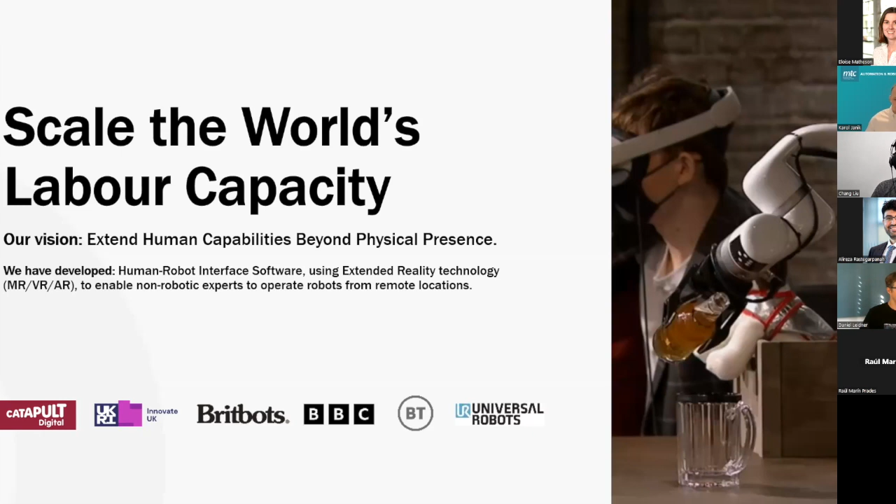So prior to Extend, I was a postdoc at Imperial College and spent 10 years in robotics and AI research and in high-tech startups. So I started the company in 2019 and brought together a strong technical team with expert experience in robotics, immersive technology, and cloud computing. So this team is well established with background from Imperial College, National Nuclear Robotics Research Centre, Tata Consulting, and AWS. We recently collaborated with Universal Robots and RAR UK Automation, one of the largest collaborative robot distributors.

Sounds great. The story starts from here. So the concept of teleoperated robots is nothing new. It was invented 50 years ago. I'm sure everyone in the audience is very familiar. It's mainly for surgery, nuclear, space, and military applications. The idea is simple: to allow skilled operators to remotely perform hard-to-automate physical tasks that are mission critical. But the question is why we have spent such a long time developing these technologies, but still are not able to adopt them in a wider market beyond these extreme environments?

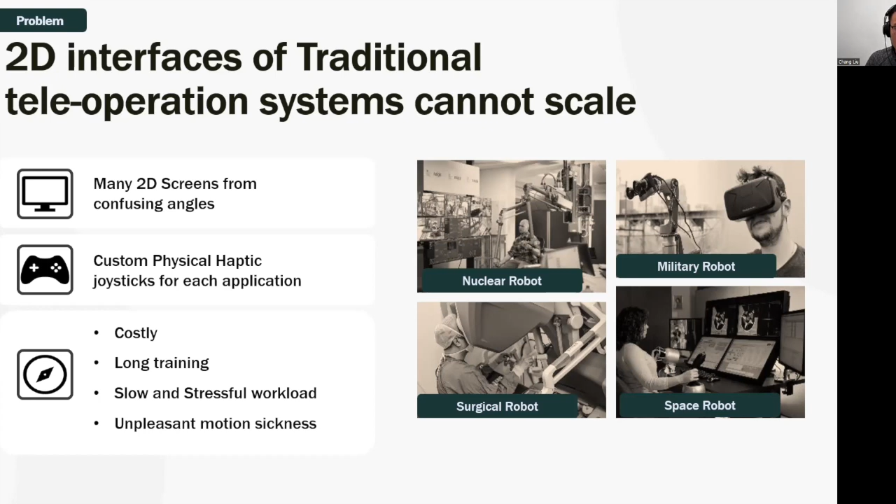Well, I believe the answer is really that today's robotic control interface sets a large barrier for people to use them easily. Their interfaces are custom equipment based on physical joysticks and lots of flat 2D screens. So therefore, they're typically expensive and hard to use. They require highly trained professionals to operate them, but still result in slow operations and stressful workload.

And our solution addresses these shortcomings and expands the potential of the market. So we have created a gamified human-robot interface middleware platform based on extended reality technologies, meaning VR, AR, or mixed reality. But we focus on creating the most advanced 3D graphics and streaming engine that has been patented.

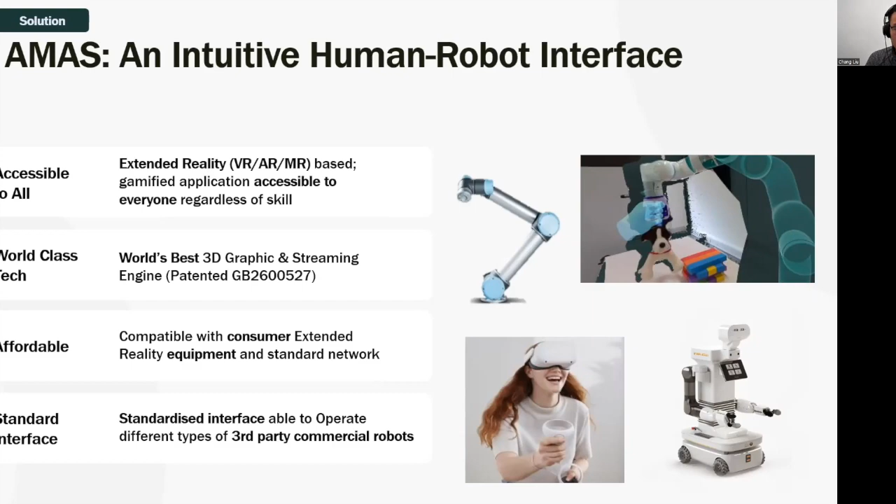Fundamentally, it offers an ordinary user an intuitive approach into a remote workspace, enabling the use of affordable consumer VR equipment as a standardized interface to operate a wide range of third-party commercial robots. So this really is a software-focused solution acting as an easy upgrade to existing third-party robots.

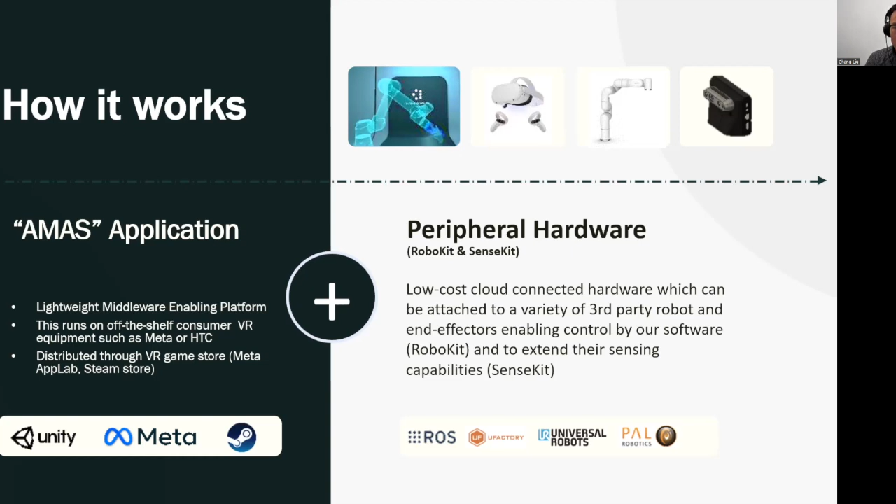It consists of two parts. First is the Extend AMAS VR application that's running on consumer VR equipment as ordinary VR games. And the second part is the peripheral hardware we call SenseKit and RoboKit, which can be attached to these robots, enabling 3D sensing, connectivity, and control. So both parts communicate over any networks to enable remote operations.

And so our patented volumetric streaming algorithm really gives us outstanding latency performance and 20 times bandwidth reduction compared to state-of-the-art streaming techniques. So bear in mind, this is really streaming the 3D volumetric data rather than a traditional 2D video. So that part is really outstanding.

So we're fortunate to be in a quite unique position in the market where our core technology combines outstanding 3D visual perception with intuitive control, and this results in an order of magnitude more productive solutions with lower cost of ownership compared to any alternatives in the market.

The benefit is really to remove the barrier for people to use robots by reducing the interface hardware costs from typically over 300,000 to just 300 pounds of gaming VR headset, reducing the setup and the operator training time from days, weeks to just a few minutes, and 3 times faster manipulations with reduced cognitive workload. And our integrated automation feature is more robust and more efficient with human in the loop.

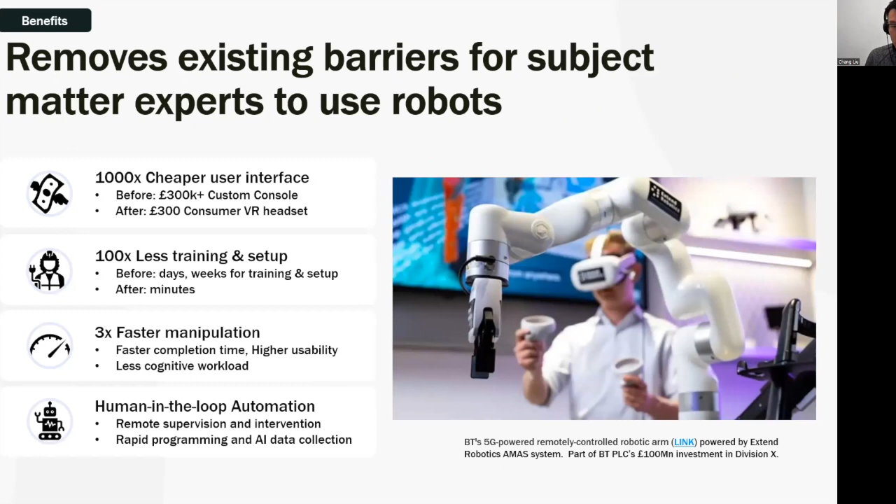The third part is the automation copilot that allows the operator to rapidly automate any physical tasks remotely on demand within the same interface. So this feature enables remote supervision, intervention, and reprogramming of automated pipelines, while being compatible with third-party automations via standard ROS interface.

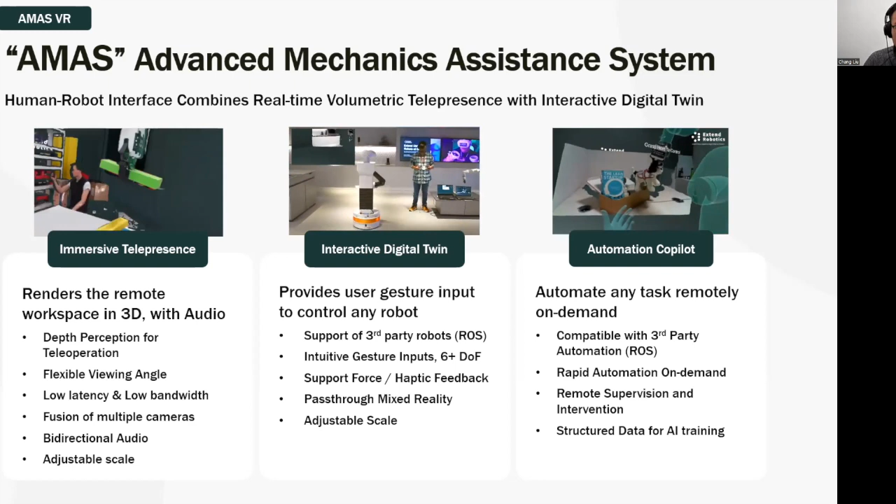So our vision is really that combining these three key technologies will enable large-scale fleet learning over the cloud via shared autonomy, ultimately delivering robust real-world value on day one with human in the loop, while accelerating automation by learning from human intelligence. And this is really our vision.

So we aim to have this automation copilot start with repeating simple tasks and ultimately learn to operate more general-purpose dynamic tasks over time, becoming more and more capable, and hopefully we can allow fewer operators to control more robots, and that's the method by which we scale labor capacity, as originally stated in our mission statement.

So that's the technology, and then a little bit about the commercial side. So with the large global market for telerobotics at 82 billion by 2027, our solution enables general purpose remote working, extending beyond traditional telerobotics applications.

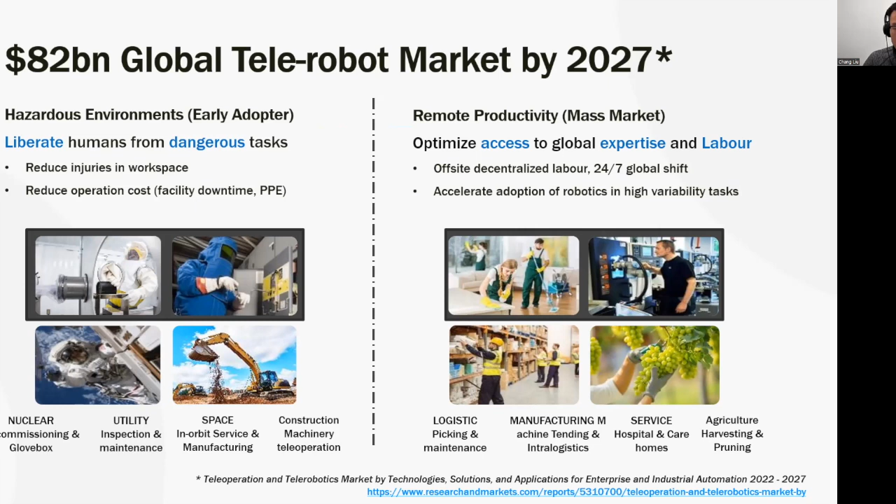So for our market entry, we typically set up three key offers for our customers. First, our core offer is the OEM software, offering recurring license fees to technology integrators and research projects who are already using their own robots. And second is the integrated system that combines one-off hardware payment with recurring license fees. This drives the adoption of new application users who don't yet have their own robots.

And third, for the case of tailored customizations, we'll offer professional services to support our visionary customers to fit their specific use case.

So far, we have established world-class channels and partners accelerating our route to market. We're partnered with the UK's largest robot distributor, RAR UK Automation, distributing our app through mainstream VR application stores. Second, we have been certified and are partnering with the world's largest collaborative robot vendor, Universal Robots, as well as UFactory, Mitsubishi Electric, and PAL Robotics.

Third is our strong connection with management consultancies and integrators, who will hopefully integrate the technology into enterprise and end users, and potentially resell our product as well. With any partnership collaborations, we're really keen to put most of our time into supporting our partners to integrate our technology better into their solutions.

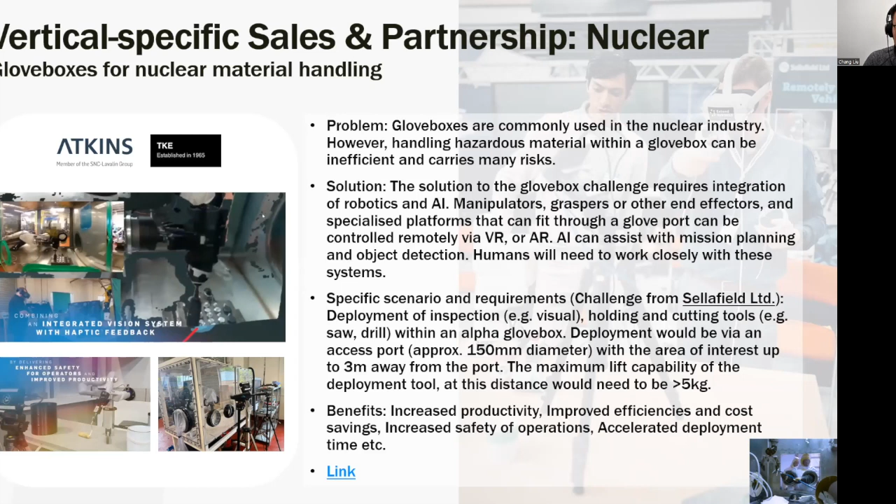So I've also prepared a few examples of use cases. One example is the nuclear use case for remote handling of contaminated materials in an Alpha Glove Box. We've been working with Atkins, one of the UK's largest technology integrators for Sellafield, who has purchased our software and peripheral hardware for their robotized glove box projects. This project will make glove box operations much safer and more efficient by removing human exposure to radiation risks.

A second example is the space application. We focus on in-orbit servicing and manufacturing applications. We've conducted several feasibility studies funded by UKSA and the European Space Agency, and the solution has been purchased by Satellite Applications Catapult. We aim to develop safer and faster operations to allow astronauts to perform complex handling tasks within spacecraft, and even allow subject matter experts from Earth to perform assembly and servicing tasks in space.

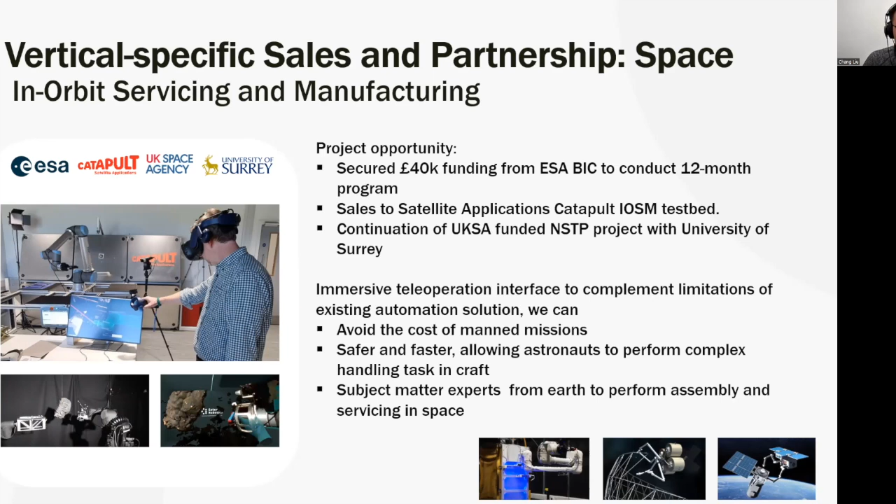The last but not least is the third use case: precision viticulture. We've led a consortium which includes Queen Mary University and Saffron Grange vineyard in Cambridge, to collaboratively develop an integrated human-augmented robotic and intelligent sensing platform to revolutionize grape harvesting and pruning. This is a 1 million pound project awarded by Innovate UK, and we'll be working on that as well.

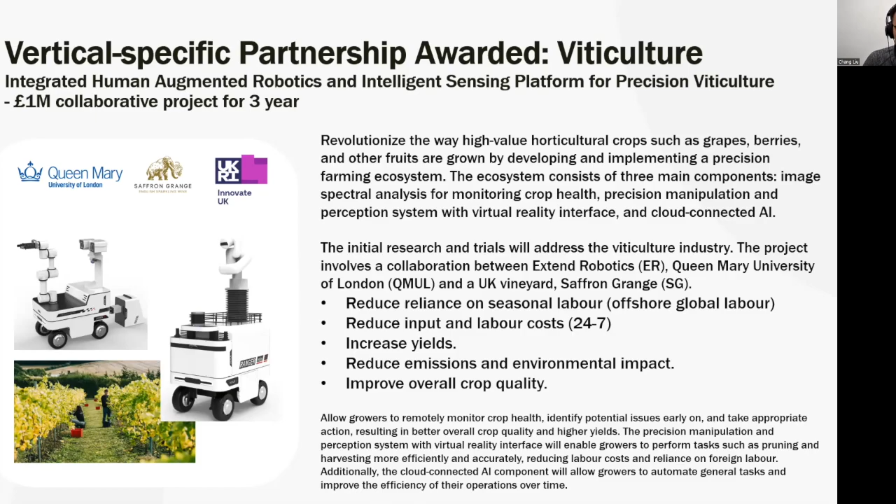Yeah, so that's pretty much it. I think it's about 15 minutes. Thank you so much for listening, and any questions would be great.

Thank you very much, Chang. Very interesting. If there are any questions, just feel free to ask or drop them in the chat.

The one question that I have: agri-tech is quite interesting in terms of telerobotics. Do you see much uptake in that space, more from an end user perspective rather than research and development? Because agri-tech with robotics is obviously tricky in terms of having the right business case for deploying complex solutions. It'd be interesting to hear your perspective on that.

Yeah, that's a great question, Carl. For agriculture, we've been engaging with quite a few farms in the UK. They responded quite positively. I think right now there's a strong need, especially with the labor shortage in the UK, with the kind of returning European farmers creating a big problem in labor availability, especially for harvesting and pruning. That work is labor intensive but also time sensitive, and during that period really need enough people to do the harvesting. So I think there's a strong need for solutions to bridge the labor shortage.

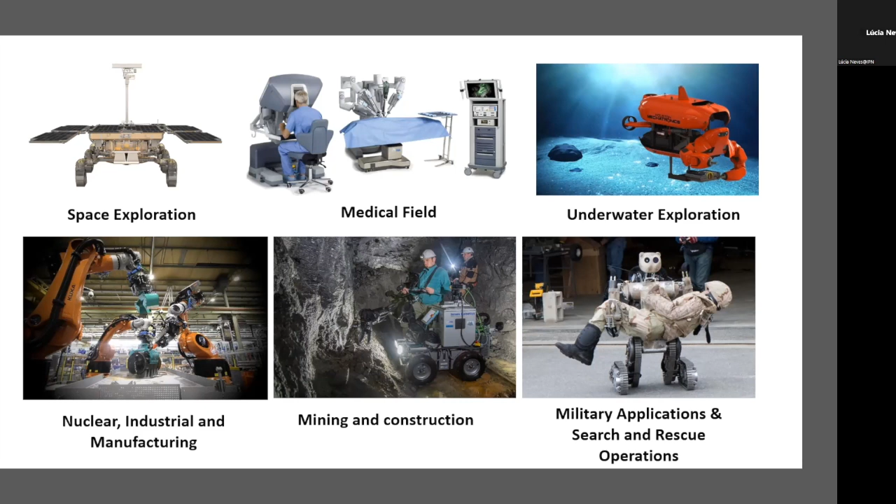Robotic telemanipulation significantly facilitates the execution of various challenging tasks across multiple domains by amplifying human manipulation capabilities in remote and safety-critical environments where direct human interaction is basically impractical. For example, in the medical sector, telemanipulation systems are used to perform complex surgical procedures, while in the nuclear context, they assist in conducting complex decommissioning tasks.

One of the common telerobotic systems usually used in the nuclear industry is master-slave manipulators. These systems have a master unit, which is operated by a human, and a slave unit, which performs actions in hazardous environments. Movements of the master are usually mirrored by the slave, providing a direct and intuitive control interface.

Currently, telemanipulation setups in an unstructured environment predominantly depend on the operator's expertise. Managing remote manipulation tasks using these mechanical devices in such settings is significantly challenging, and the operator also experiences a cognitive load during manipulation with these teleoperation systems.

To illustrate, when picking and placing an object in a remote scene, the operator must intelligently calculate the inverse kinematics while avoiding mechanical singularities and navigate the robots towards the desired positions.

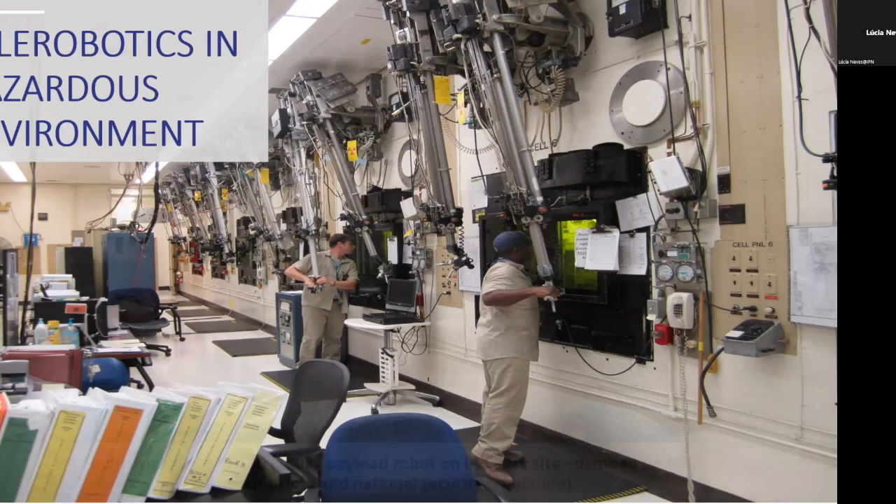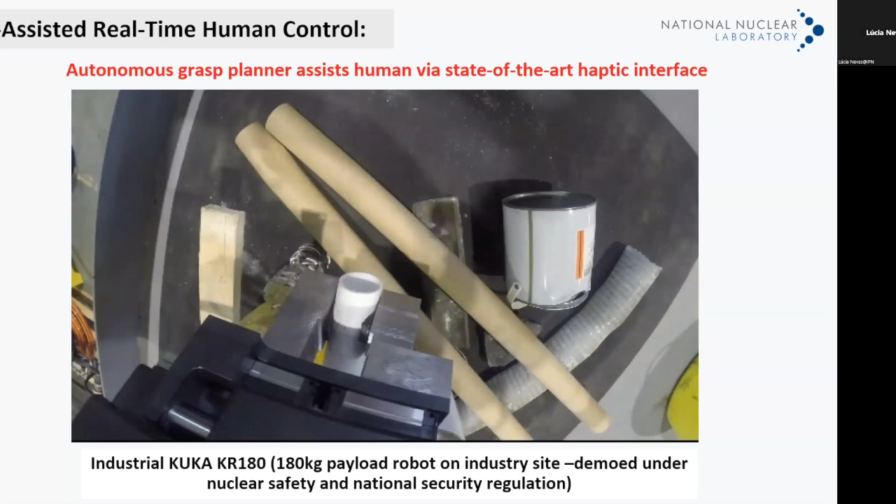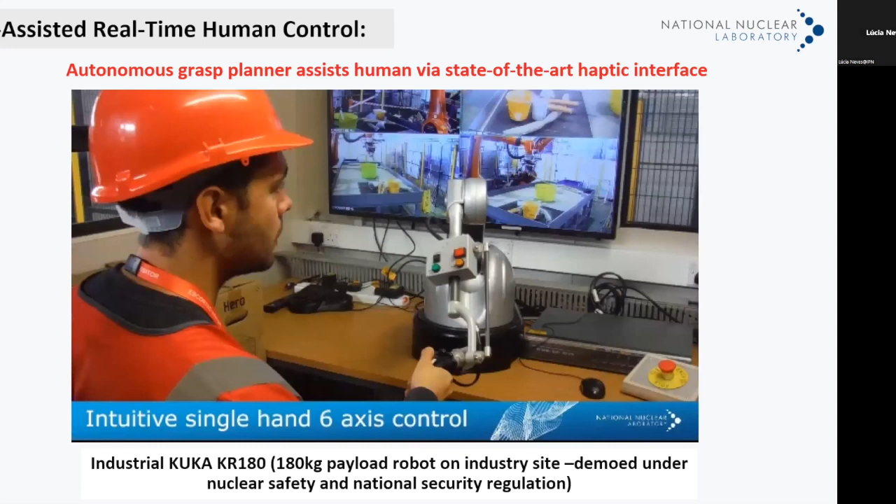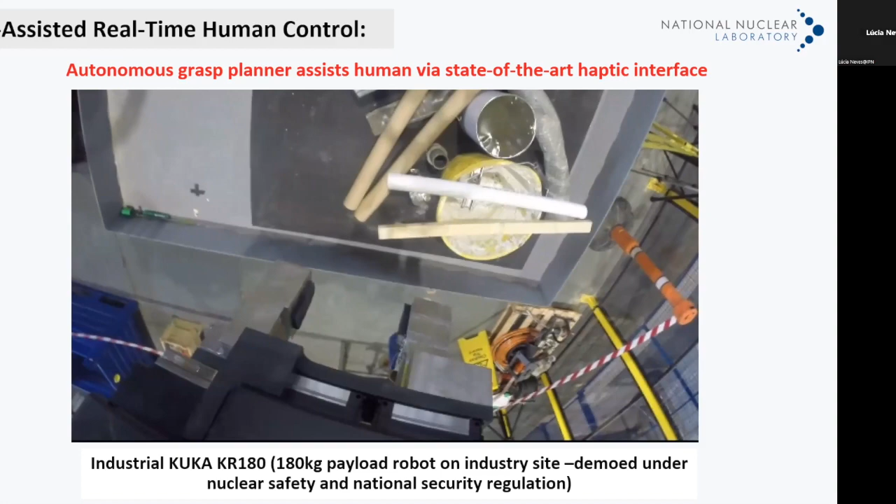We developed an autonomous grasp planner at a nuclear facility, the National Nuclear Lab, in 2016 for sorting and segregation of contaminated nuclear objects. We used a 6-DoF Haption as the master unit and an industrial KUKA KR180 as the slave robot. Our developed telerobotic system combines master-slave teleoperation with a model-free and learning-free grasping algorithm through a dynamic grasp re-ranking strategy and semi-autonomous reach-to-grasp trajectory guidance. The re-ranking metric dynamically updates stable grasps based on the slave device's current state, and the trajectory guidance system helps maintain smooth trajectory by controlling haptic forces. In addition, a virtual pose controller is integrated with the guidance system to automatically correct the defective orientation during reaching towards the grasp position. I will go into detail about the grasp planner in the next slides.

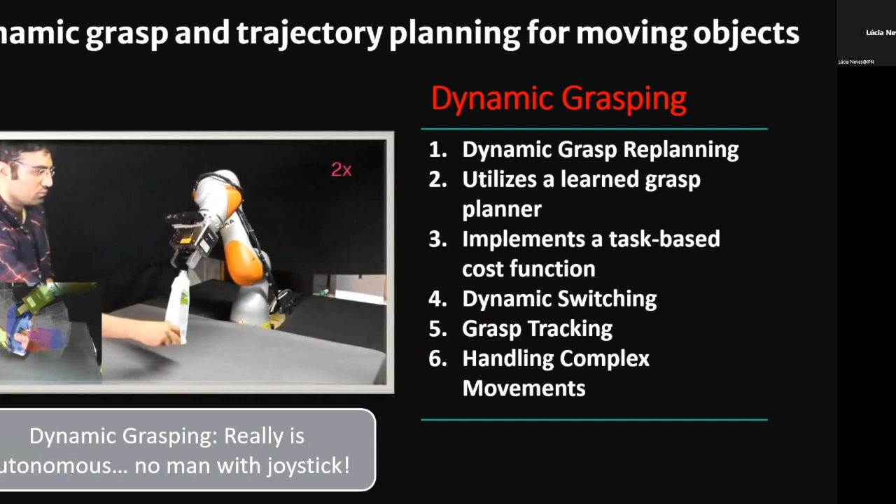This is me in the video, back when I was younger, in 2017. As you can see, the robots can follow and grasp moving objects tracked by a vision system, and I can hand over the object to the robot during collaborative working. This is really autonomous, and there is no man with a joystick sitting behind the scene. While I randomly move the object, a set of likely grasps are evaluated online to generate a feasible grasp with respect to the current configuration of the robot, the target grasp, and also the constraints of finding a collision-free trajectory to reach that configuration.

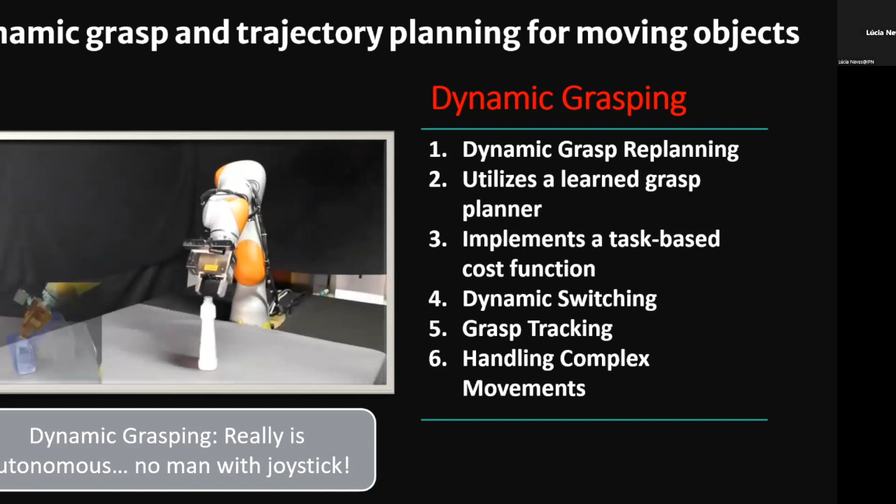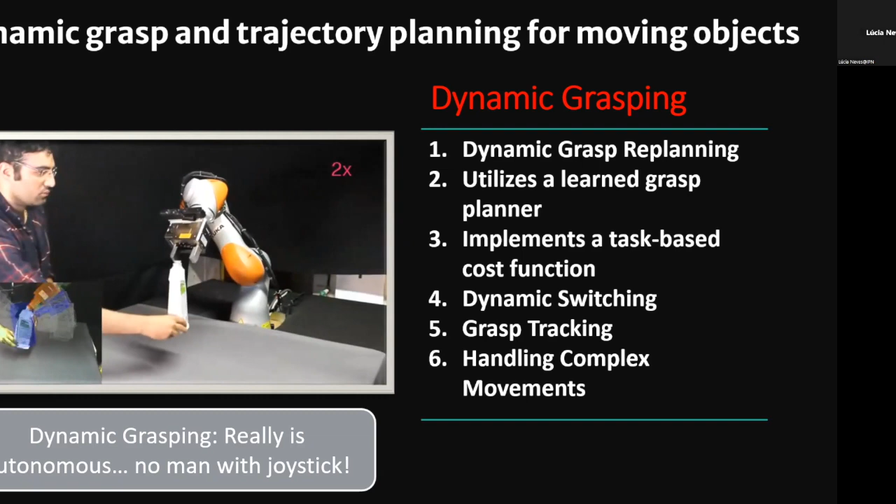We developed a method that dynamically switches between two planners: a local planner, which smoothly tracks the object and keeps a steady pre-grasp pose, and a global planner, which quickly moves the hand to a new grasp on a totally different part of the object if the previous part becomes unreachable. This is our grasp planner, and I will explain how we integrated it into telerobotics platforms.

Telerobotics is also a crucial tool in remanufacturing, particularly in the automotive industry, for the reuse and recycling of EV batteries, electric vehicle batteries.

I'm the co-I of the EU-funded REBELION project, and I'm also leading the automation part of the ReLiB project, which is funded by the Faraday Institution. These two projects primarily focus on robotizing the process of testing, disassembly, and sorting of EV batteries using advanced robotics and artificial intelligence. Battery disassembly has a hierarchy that starts at the pack level, goes down to the module level, and ends at the cell level.

However, the process of robotic disassembly is challenging and carries high safety risks, such as thermal runaway and explosion. This means the temperature can immediately rise to 600 degrees Celsius, and even firefighters may abandon a burning vehicle on the road, returning only a few days later to remove it. Other risks include the release of electrolytes and toxic gases, short circuits, and fires, which necessitates the use of telerobotics for safe and remote operations.

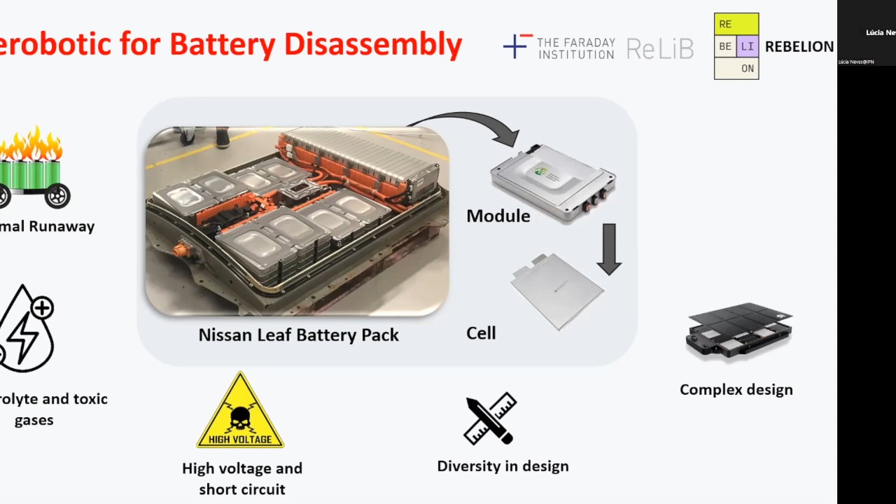In addition, there is diversity in the design of batteries and a lack of information from manufacturers about these designs. This means any development must be generalizable to be applicable to different battery models and different types of batteries. There are also almost no safety regulations at the moment related to EV batteries.

At the moment, we hear a lot about EV batteries reaching the end of life. However, we are also facing another serious challenge with the pile of damaged batteries. Sometimes these are only labeled as damaged, but with proper testing, they can be brought back into their life cycle. Sometimes only by replacing a battery module, the entire pack can be retrieved.

I'm working closely with one of the largest insurance companies in the country, which is struggling with an increasing number of these damaged batteries. The only solution available at the moment is to send these damaged batteries to salvage centers for direct recycling, shredding them into small particles to create black mass. Unfortunately, the quality of the black mass is not sufficient to manufacture new batteries using these materials. Therefore, there is significant profit loss for insurance companies and end users, primarily due to the lack of a safe mechanism for testing and disassembling these high-risk batteries.

To address this challenge, we have developed various frameworks for the autonomous testing and disassembly of EV batteries.

We have categorized disassembly tasks into autonomous tasks, such as repetitive actions like unbolting, and semi-autonomous tasks, which are sensitive, like cutting the battery module to remove the cells. What you see in these videos is a pilot study designed for disassembly and sorting disassembled EV battery components.

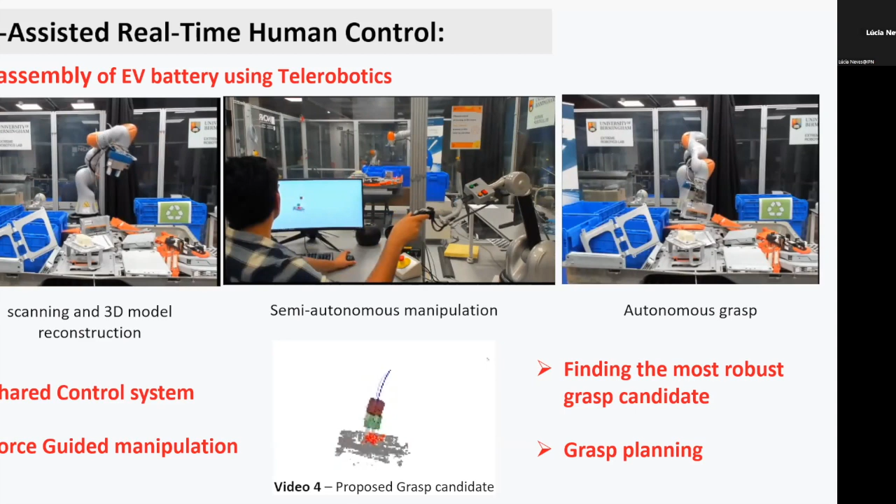Once this planner is executed, the user can take control of the robot at any time. The grasp planner assists the user in moving the robot along one of the proposed trajectories, and any deviation from this path will appear as resistance on the haptic device. That's why we call it a force-guided teleoperation system.

We extended upon our previous work by developing two additional teleoperation platforms for the application of battery disassembly, but it can be generalized to various applications, such as disassembly of complex products or other applications explained in the first slide. In the first platform, we use two identical 7-degree-of-freedom cobots as master and slave units.

In the second platform, we use a 6-DOF Phantom Omni haptic device as the master unit and a Franka arm as the slave unit. For the first platform, we implemented joint impedance control, and for the second, we used only a Cartesian impedance control system.

We evaluated these two platforms across various disassembly tasks, and found that although the haptic device showed a higher success rate, using paired cobots in the first platform enhanced the speed and also the consistency in task completion.

We also found that one-to-one torque mapping between the cobots improved grasping and cutting, these two applications, by providing more realistic interaction and stronger tactile feedback. It also increased operator effort and impacted the quality of the cut, because cutting is an important procedure during various stages of disassembly, especially when reaching from the module level to the cell level. We need to cut the modules, the battery modules, inside the battery pack.

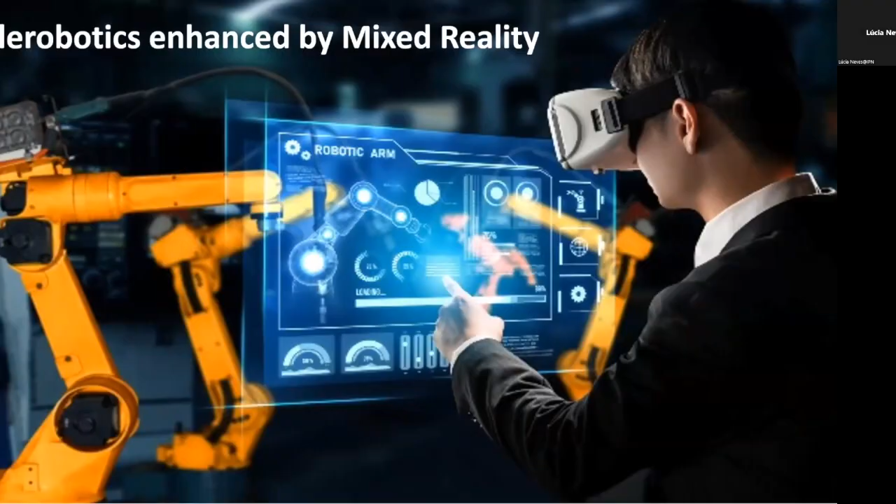Later we enhanced user capabilities by integrating mixed reality technology into the telerobotics systems. We developed a gaze tracker in which the user wears a VR headset; in this case, we use a Varjo headset.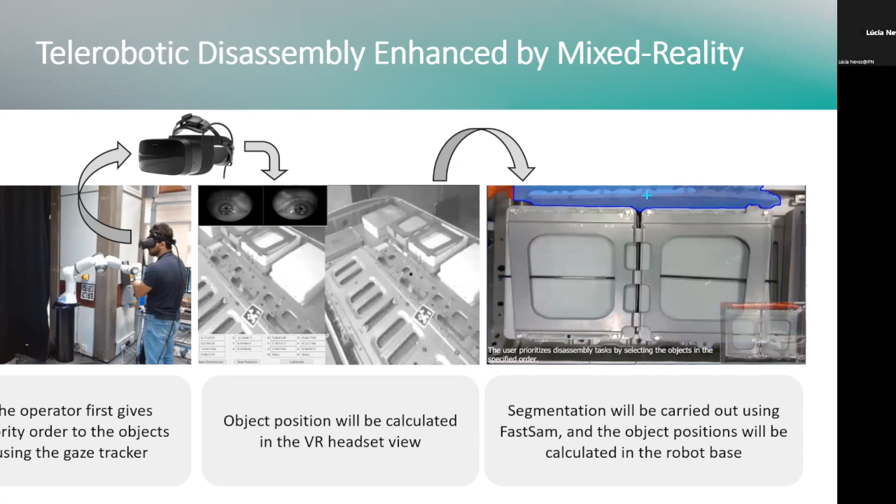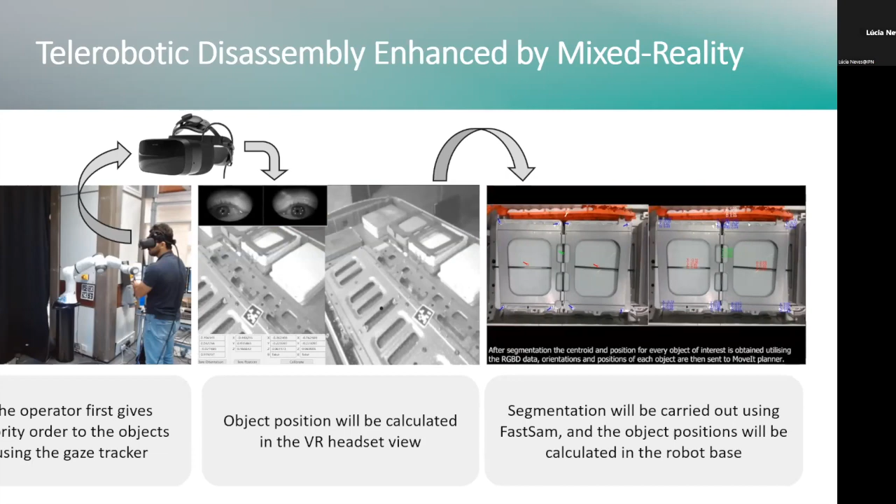The gaze tracker serves as a medium to interact with the simulation environment. The user uses this gaze tracker to verify whether the captured point cloud includes all points of interest, and then segmentation using FastSam will be conducted. In that sense, the user will select the hierarchy of disassembly tasks just by staring at the objects and marking them.

We enhanced user capability by integrating our mixed reality platform into the master-slave teleoperation system. This video on the right-hand side shows the headset view, where the user has access to multiple camera views and can switch between them using virtual buttons, as shown in the central image.

When the user holds his or her palm in front of the camera, the view selection will be activated, and he or she can switch between these camera views. We also use depth images as an interface medium, which will be explained in the next slide.

We found that users exhibit improved performance in terms of time and accuracy when completing tasks, especially contact-rich tasks like cutting, when using a combination of camera views, point cloud views, and different types of interfaces.

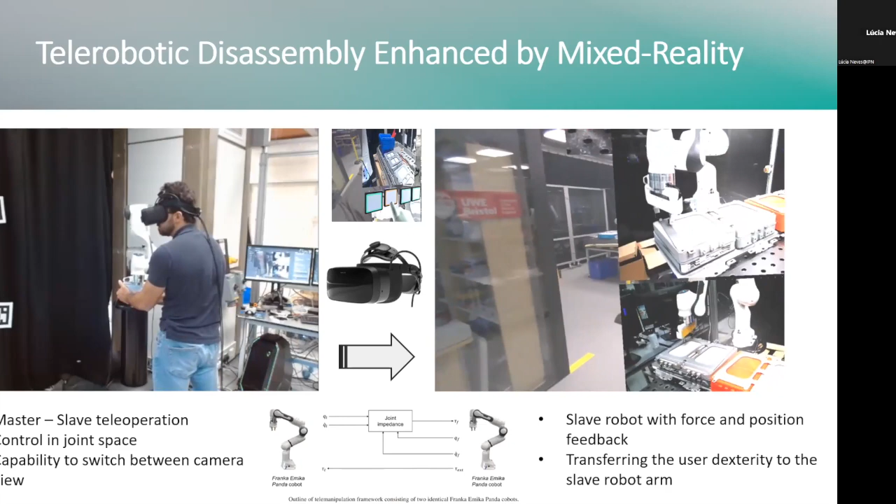So we conducted an experiment controlling the robot in two different modes. The first one, on the left-hand side, is manual mode, and the right-hand side is the other mode.

Last minute, Ali. Oh, sorry. Yeah, I will try to squeeze in that one.

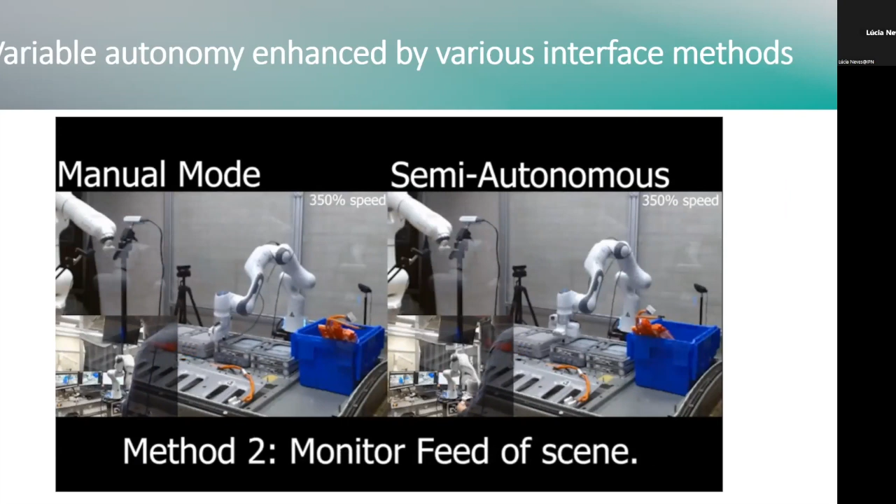So we performed disassembly for battery using different interfaces, including point clouds and also a direct view of the scene. And we evaluated basically these two platforms with each other.